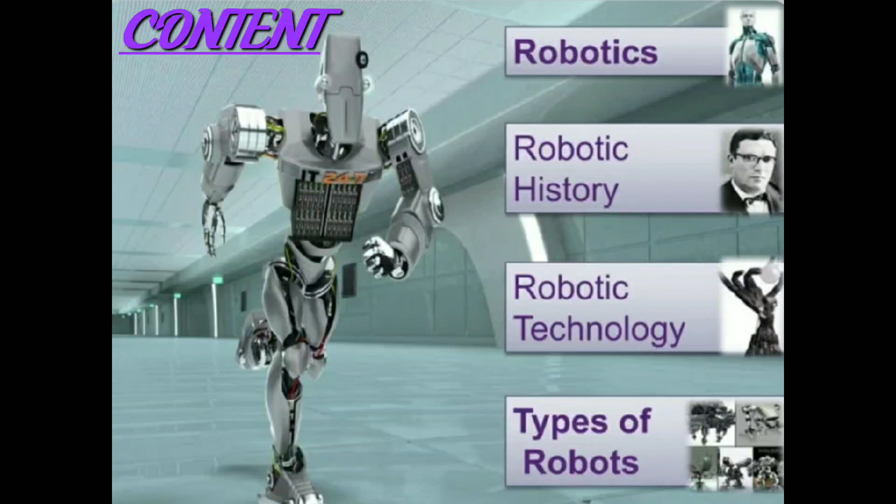In this robotic presentation, we discuss some contents: robotics, robotic history, robotic technology, types of robots, and etc.

What is a robot? A reprogrammable, multifunctional, automatic industrial machine designed to replace humans in hazardous work. It can be used as an automatic machine sweeper, an automatic car for a child to play with, a machine removing mines in a war field, in space, in military, and many more.

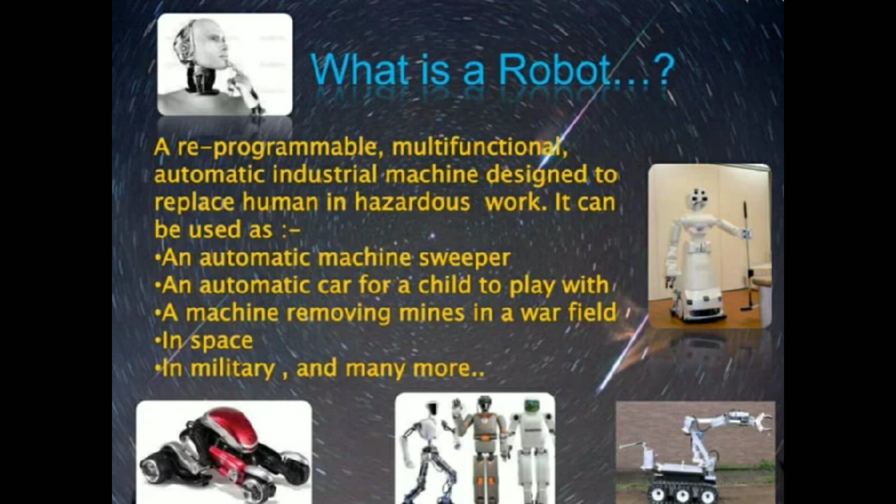And what is robotics? Robotics is the science of designing or building an application of robots. Simply, robotics may be defined as the study of robots. The aim of robotics is to design an efficient robot.

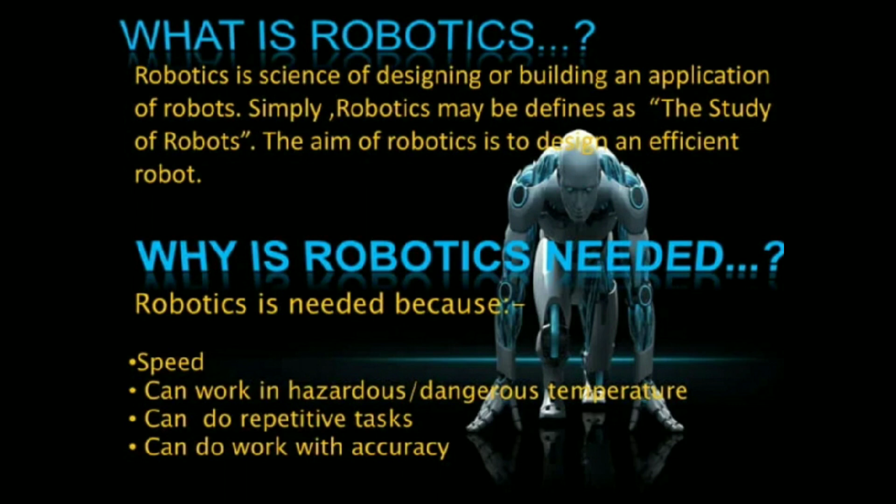Why is robotics needed? Robotics is needed because of speed, it can work in hazardous or dangerous temperatures, it can do repetitive tasks, it can do work with accuracy.

And robotic history: first use of the word robotics, three laws of robotics, and the first robot, Unimate. First use of the word robotics.

The word robot was introduced to the public by Czech writer Karel Capek, between 1890 to 1938, in his play R.U.R. It means Rossum's Universal Robots, published in 1920.

The play begins in a factory that makes artificial people called robots. Capek was reportedly several times a candidate for the Nobel Prize for his works.

The word robotics, used to describe this field of study, was coined accidentally by the Russian-born American scientist and science fiction writer Isaac Asimov, who lived between 1920 and 1992, in the 1940s.

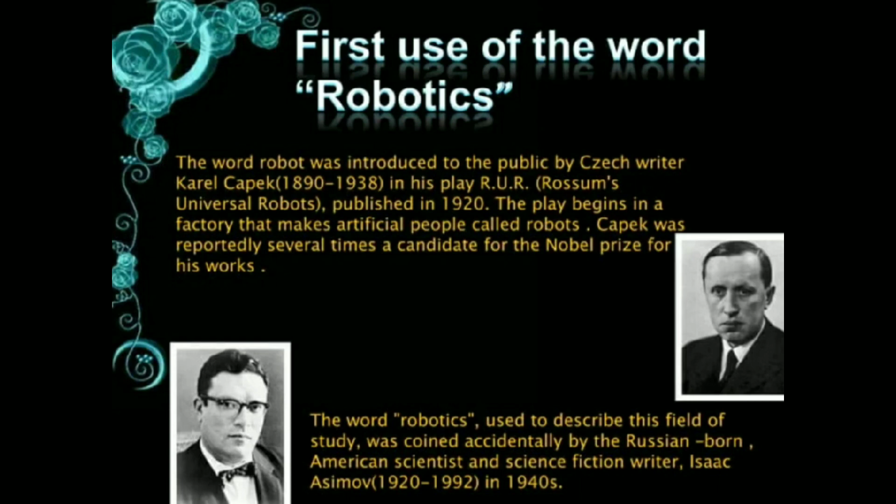The three laws of robotics. Asimov also proposed his three laws of robotics, and he later added a zeroth law.

Zeroth law: a robot may not injure humanity, or through inaction, allow humanity to come to harm. First law: a robot may not injure a human being, or through inaction, allow a human being to come to harm, unless this would violate a higher order law.

Second law: a robot must obey orders given to it by human beings, except where such orders would conflict with a higher order law. Third law: a robot must protect its own existence as long as such protection does not conflict with a higher order law.

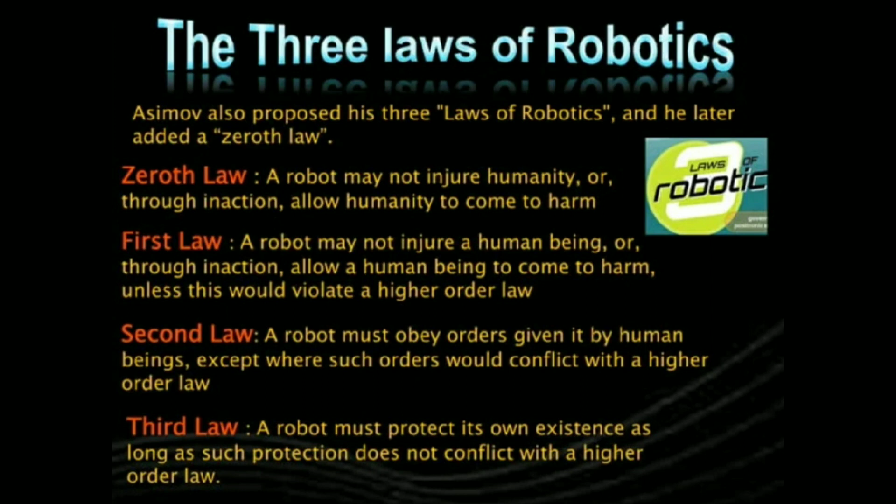Most industrial robots have at least the following five parts: sensors, effectors, actuators, controllers, and arms. The first one is sensors.

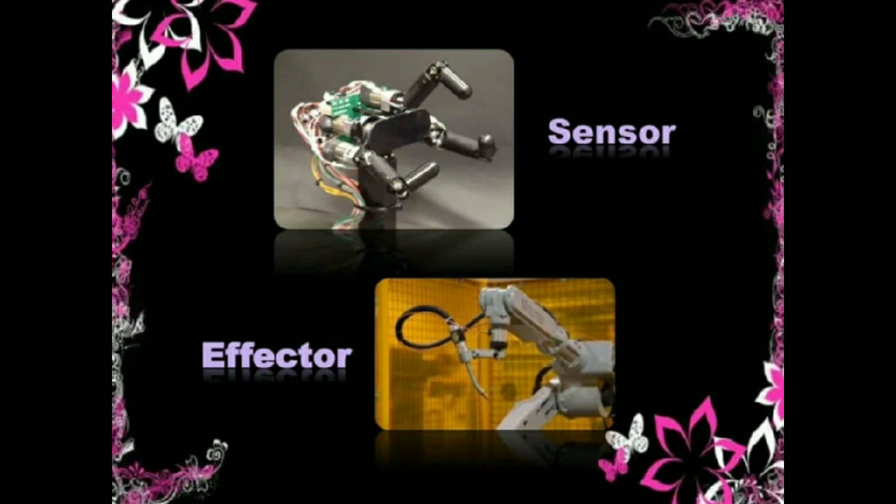This is a sensor of the robot, and this is an effector of the robot. The next one is the controller of the robot, and the arm. This is the arm of the robot.

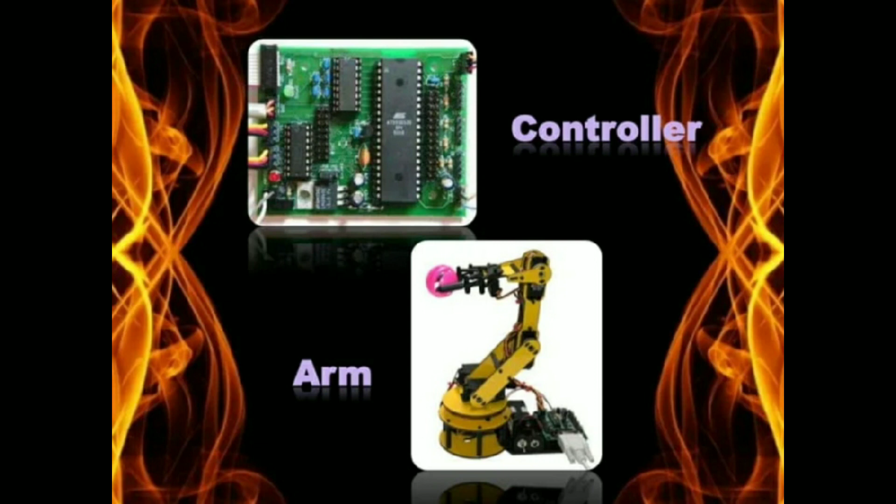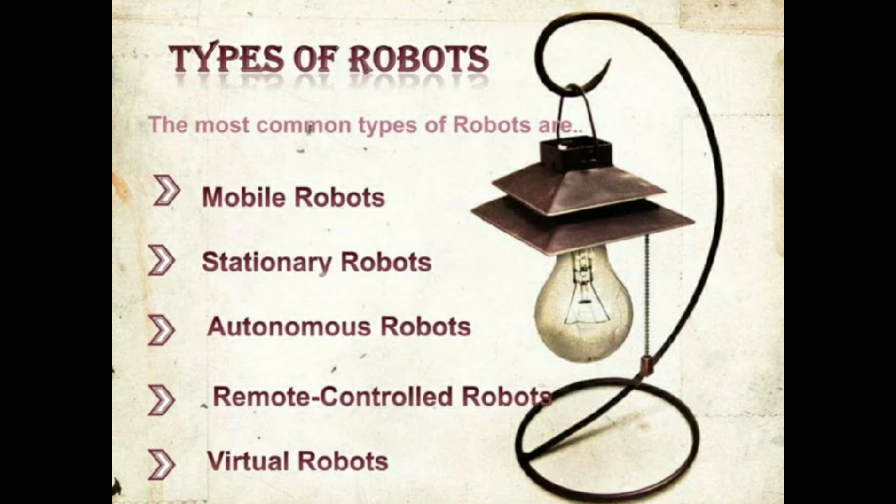Types of robots. The most common types of robots are mobile robots, stationary robots, autonomous robots, remote control robots, and virtual robots.

Mobile robots are of two types: rolling robots and walking robots. Rolling robots have wheels to move around. They can quickly and easily search. However, they are only useful in flat areas.

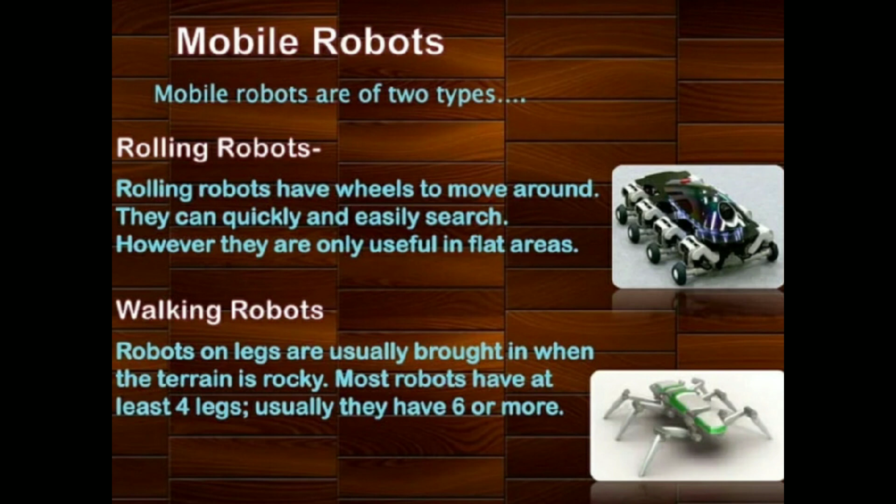Walking robots: robots on legs are usually brought in when the terrain is rocky. Most robots have at least 4 legs; usually they have 6 or more.

Stationary robots. Robots are not only used to explore areas or imitate a human being. Most robots perform repeating tasks without ever moving an inch, working in industry settings and remaining stationary.

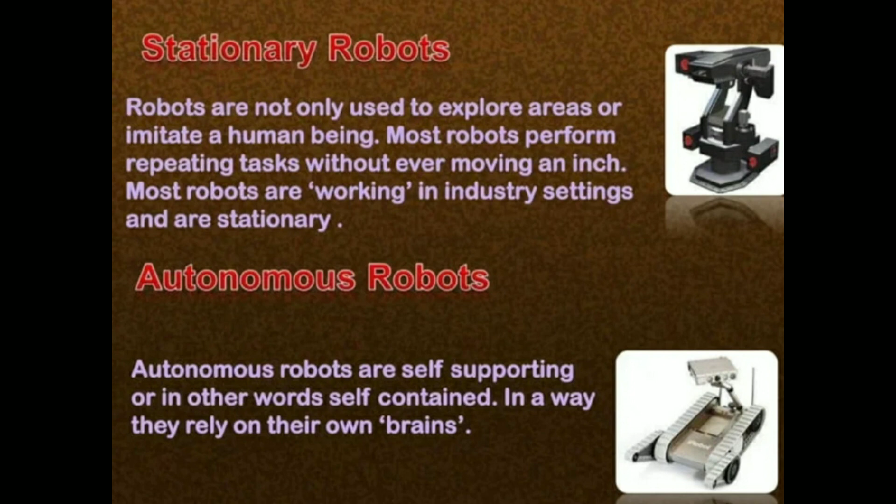Autonomous robots are self-supporting, or in other words, self-contained, in that they rely on their own brains.

Remote control robots. A person can guide a robot by remote control, performing difficult and usually dangerous tasks without being at the spot where the tasks are performed.

Virtual robots don't exist in real life. Virtual robots are just programs, building blocks of software inside a computer.

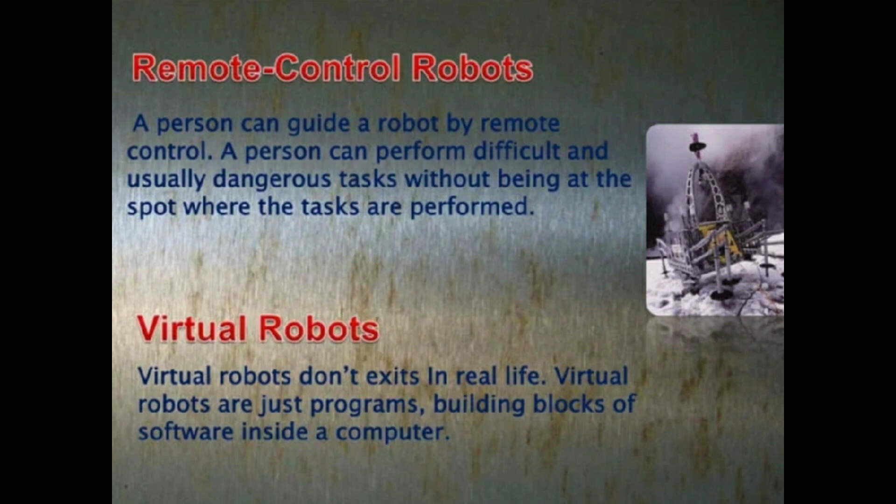Advantages of robots: going far into unknown planets and mines where humans would be crushed, giving us information that humans cannot get, working at place 24/7 without any salary and food, plus they do not get bored.

They can perform faster than humans, with much more consistency and accuracy. Most of them are automatic, so they can go around by themselves without any human interference.

Disadvantages of robots: people can lose jobs in factories. It needs a supply of power. It needs maintenance to keep running. It costs money to make or buy a robot.

Now, robotic applications: exploration, space missions, robots in the Antarctic exploring, underwater exploration, medical science, surgical assistants, assembly, factory parts handling, assembly, painting, surveillance, security—meaning bomb disposal—etc.

Home help, grass cutting, and nursing. Thank you.